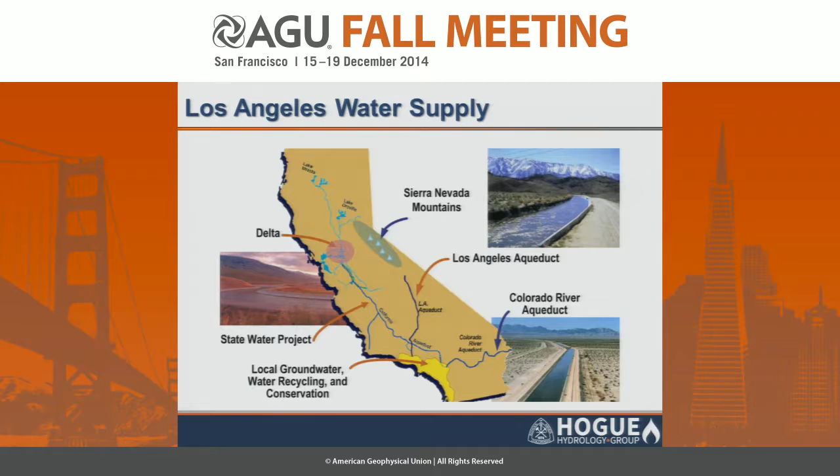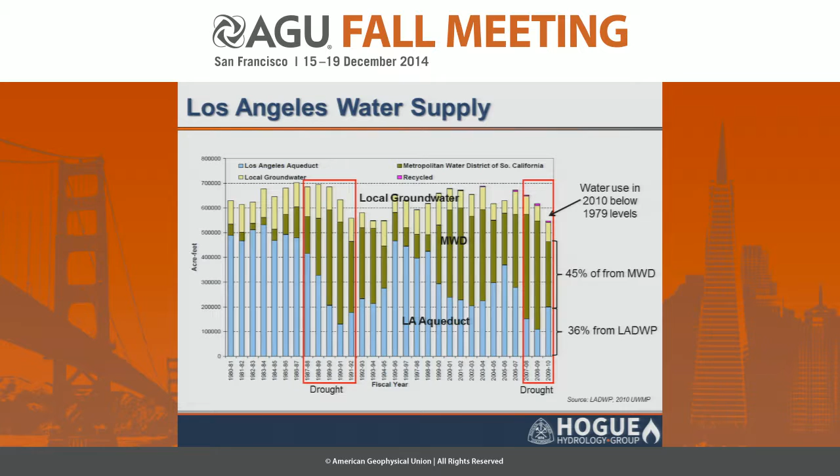You also notice that, given the last drought, we only got up to 2010 here with this data. You see that we're back down to levels from the early 1990s when they implemented indoor water saving structures to really bring down that total water use in the city. So given some of the conservation measures, and I talked about this yesterday in my talk, they've really been able to bring total water use back down. But there's still some issues.

Because of the drought, the state, as many of you know, was under direction from the governor to reduce their total water use by about 20%. And LA specifically put out a directive about 2 months ago saying that they needed to reduce per capita potable water use by 20% within a few years, and also a reduction in imported water by 50%, which is quite dramatic for a city that relies on so much water from the outside.

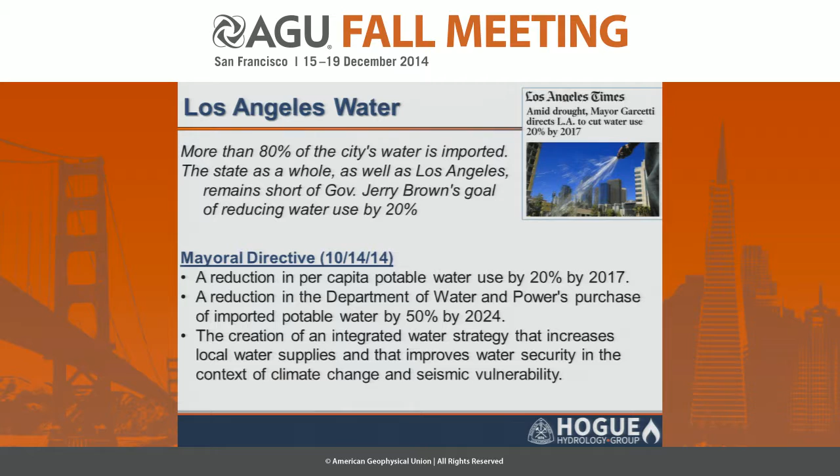So everyone's working or struggling to come up with an integrated water strategy that really looks at all the risks in the system and tries to improve the local supply within the system. So the question is, how do we get there? And this is from the Urban Water Management Plan for Los Angeles, and also in a publication that just came out in ASCE, which says LA is the blue-green city.

So here's a pie chart of the current water supply within the system, the portfolio. And again, you see, on average, the reliance on the LA Aqueduct, about 36%, Metropolitan Water District, about 50%, local groundwater, about 11%, and recycled water, pretty low. And this is what they want the portfolio to look like in about 20 years, in 2034.

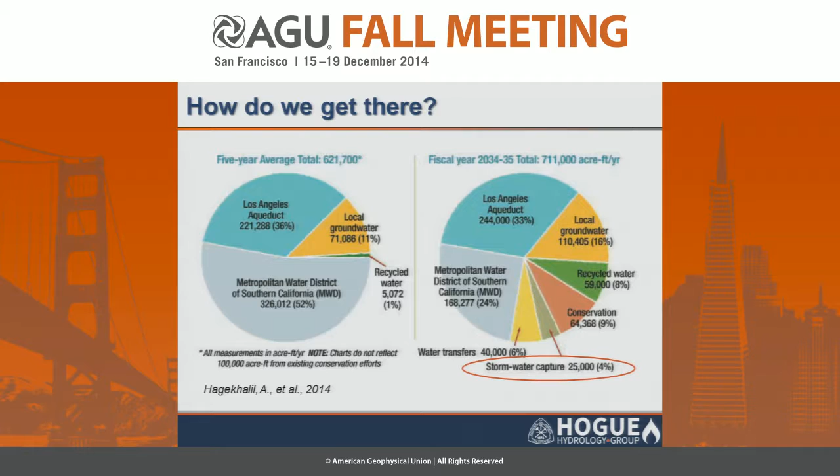So again, you see this big reduction in the imported water from Metropolitan Water District, which is the Colorado River. You also see a slight reduction in the LA Aqueduct, but over here you see this big increase in local groundwater, recycled water, conservation efforts, another 9%. And then interestingly, they say stormwater capture should be 25,000 acre feet per year, and that's about 4% of this pie chart here. And then water transfers are purchasing water from other sectors.

But interestingly, if you do the math, 25,000 acre feet is only about 6% of the annual rainfall over the city of Los Angeles. To me, that seems pretty conservative.

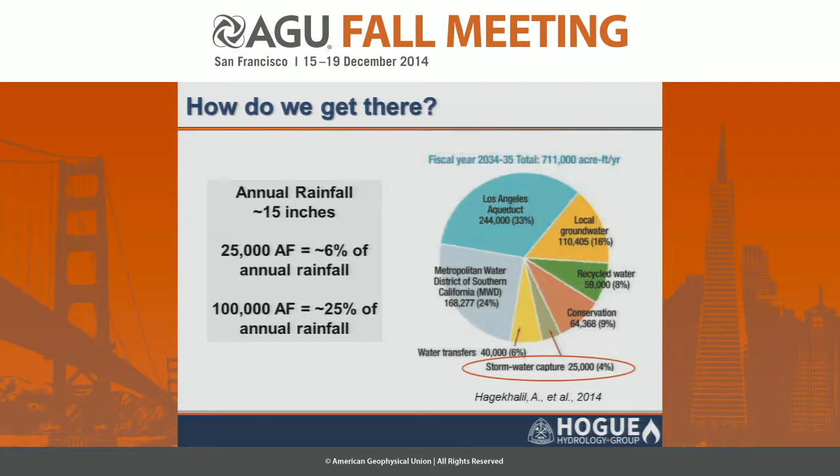You know, if they would capture about 25% of the annual rainfall, you end up with about 100,000 acre feet of stormwater capture. So the question is, how hard or how easy is it to capture this rainfall in stormwater systems, and are we being too conservative, or what's the capacity?

So a project that the city funded is called the LA Clean Water Sustainability Analysis, and it's really looking at LA's One Water vision. But our role in the project is really to look at kind of the TMDL compliance. That was the driver of much of this work, is how do we meet water quality, because Los Angeles is under orders to basically meet TMDLs.

And then what are some of these ancillary benefits, which is we can decrease imported water by looking at more recharge, and can we still maintain flood protection or even improve flood protection if we put in some sort of stormwater capture system. And then other players on the project are basically looking at kind of the added value to health and safety, community parks, and open space.

So we're doing the modeling part of this project, and this is our modeling roadmap. We're using SUSTAIN, which is the EPA's model that has basically SWMM and HSPF and some BMP implementation. We're looking at 3 watersheds within the LA Basin: Ballona Creek, Dominguez Channel, and the LA River. And again, the primary driver is the water quality compliance, looking at the different TMDLs in the different watershed systems, and then the ancillary benefits, as I talked about.

And then overall in the project, they're looking at what are the economics of meeting these compliance, what are the benefits of that additional water, if there is any, and then how do we look at these 2 other streams of wastewater and other water in the system.

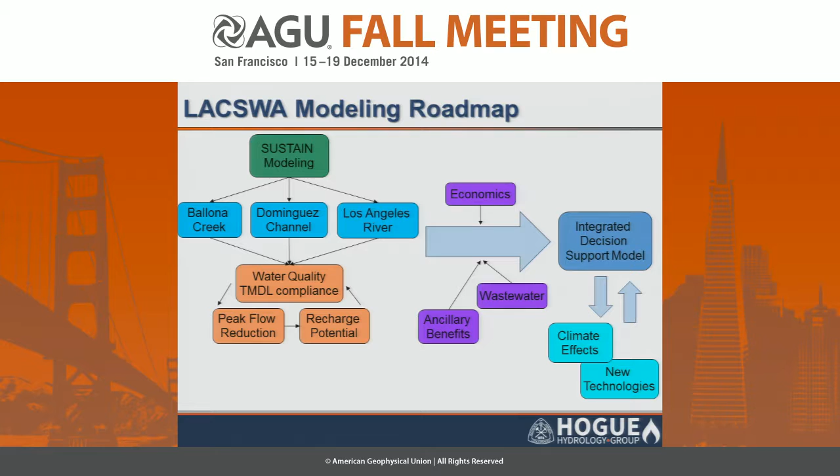So again, the modeling goals are really to look at BMPs that can help us meet TMDL compliance. And here's just a little bit of a statement about where the guidance they're under is basically saying that by 2016, 100% of the drainage areas within Ballona, the one I'm going to show you, has to meet dry weather waste loads, and 50% of the total drainage area has to meet wet weather. And we'll talk about what those are in a minute.

And then in 2021, 100% of the drainage area has to meet both dry weather and wet weather waste load allocations. So that's a lot. I mean, in 7 years or so, they basically have to have 100% compliance.

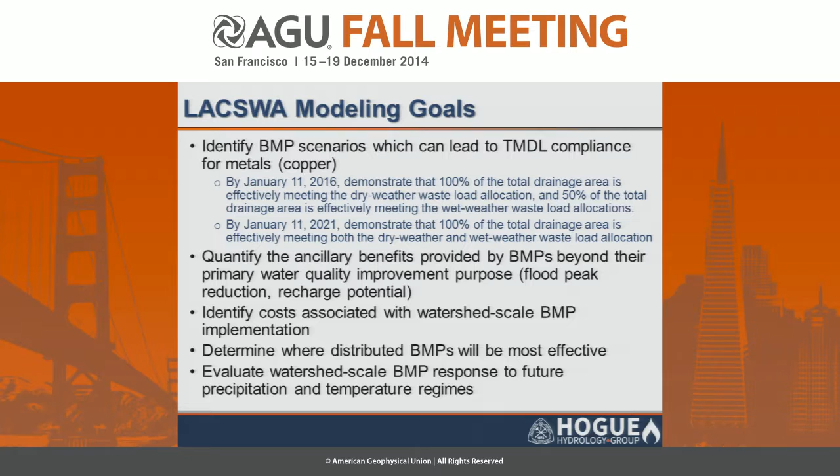And then, by putting those BMPs in to meet water quality, we look at these other benefits, the costs associated with them, where these BMPs would be most effective, and looking at, which is not done all the time, the watershed scale response of the BMPs, and then thinking about how will these perform under future conditions. Oops, I think I skipped a slide.

Yep. So we're looking again at using the SUSTAIN model, which is the SWMM model with the HSPF and Prince George BMPs, and then basically you have some optimizations within that model to look at where those BMPs should be distributed in the system and the cost associated with those BMPs.

So there's 2 ways to run BMPs within SUSTAIN. You can do kind of discrete BMPs at the parcel level, or you can use this aggregate BMP framework, which basically takes runoff from different land cover areas and routes them to different types of BMPs.

So for instance, if you look at high density residential, you can take certain areas of that and run it to a rain barrel, to a bioretention, to a dry infiltration basin, but then that dry infiltration basin may be getting runoff from other land cover types also. And so these are all aggregated, routed through the system, and then you look at the response at the outlet.

There's several BMP options within the model. We're specifically looking at using infiltration trench and basin, dry pond, bioretention, vegetated swale, and porous pavement. We didn't look at some of these other ones. I know earlier in one of the talks, rain barrel was mentioned. But again, I really think some of these BMPs are climate area specific, and I'm not sure that rain barrel is the right thing for LA.

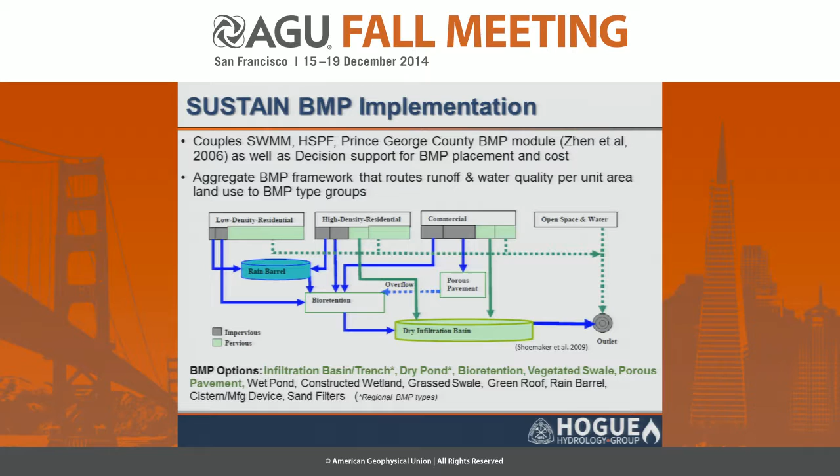As you know, most of the rain comes in the winter. You need the water in the summer, so the question becomes a maintenance and health hazard or health condition with rain barrels. So we did not optimize those.

So our first initial work has been on Ballona watershed. It's about a 130 square mile watershed. We used 8 subbasins within the system to model it. It's been calibrated with USGS and LA County data right above the wetlands.

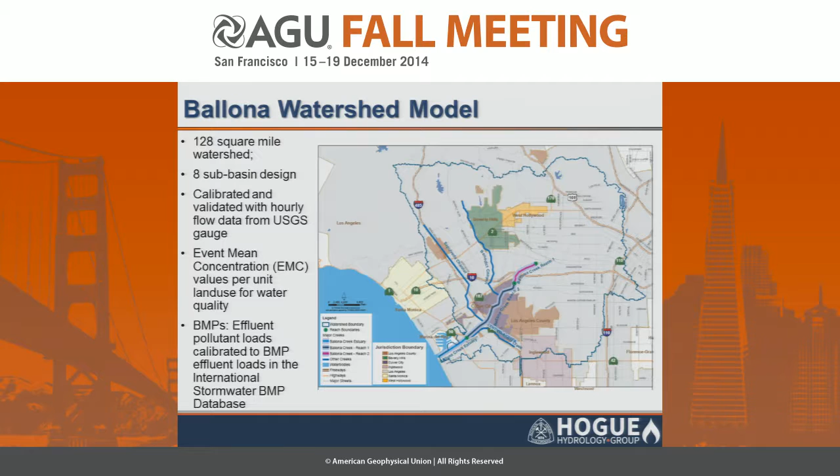We used event mean concentration data that was collected by the county and the city for water quality calibrations. And then the BMPs were calibrated using the Stormwater BMP database. Traditionally, this is what people do when they model. You can use the build-up wash-off or EMCs, and we used EMCs, and we got a better water quality calibration.

So the TMDL scenarios that we ran, a little bit about those. Again, you can do a whole bunch of things in the model. One of the things that it's known for is running these optimizations of cost and BMP types and placement. So we ran that, and that's really optimizing the load reduction relative to cost.

We also did some scenarios to look at compliance, because one of the TMDL regulations says that if you capture the 3/4 inch storm, which is about the 85th percentile storm, you're in compliance. If you just capture that, no matter what happens, if you capture that 3/4 inch storm. So we wanted to see, do we meet compliance if we run that storm?

So we looked at regional infiltration BMPs, which just capture all the water and infiltrate it, plus treat and release. We also looked at LID retrofit. So again, the ideal thing, if you know Elmer Avenue in Los Angeles, is to retrofit the system, see if everyone has this nice capture system within private property. So we looked at that scenario.

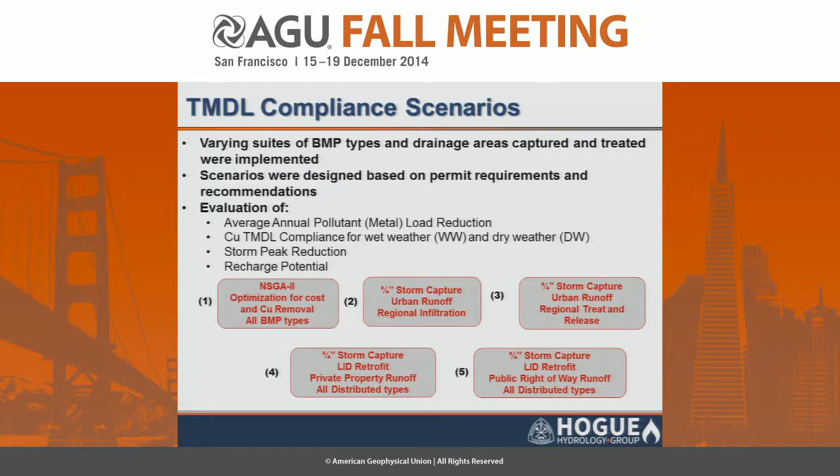And we also looked at public right-of-way runoff, thinking if we just put BMPs along the public right-of-way, which is easy to do legally, how would that perform? So here's some results, and this is just an overview of some of the scenarios. There's a poster this afternoon by Katie Radovich, a student that's primarily responsible for most of this work, and we can get more into the details there.

So when you look at the wet weather compliance and the dry weather compliance, wet weather is basically if there's a peak flow or a maximum flow of 64 cubic feet per second in that day, it's considered a wet day. If it's under 64 CFS, it's considered a dry day. And they actually just changed these. They were at 40 CFS, but because there's so much dry weather flow in the system from irrigation, they upped these.

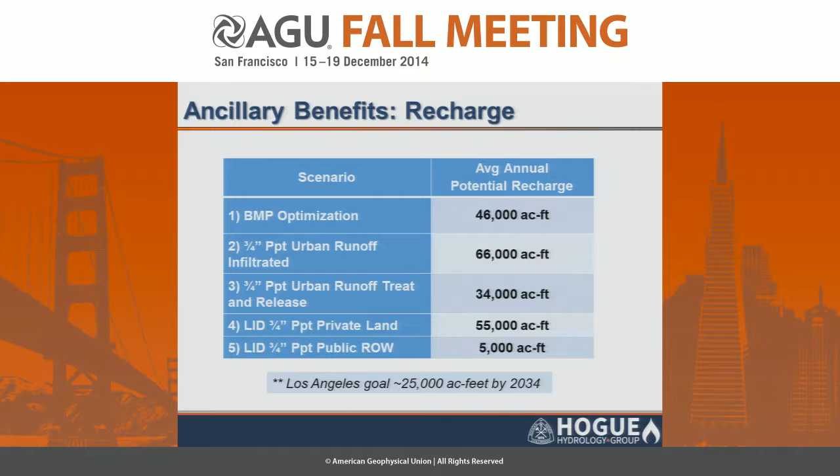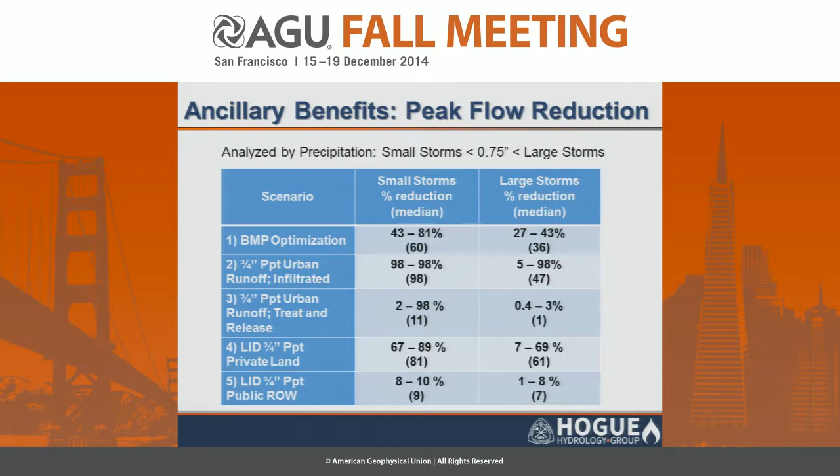So I'll conclude on this slide and basically say that I think the goal of 25,000 acre feet stormwater use by 2034 is obviously doable. It's only 6% of the annual precipitation. So the question is, is that under-ambitious for the city's goals? Obviously, there's other factors to consider. What's the storage and how does that play into the regional groundwater plumes and things as far as contamination. But again, I think they've got some fairly realistic goals of stormwater capture.

From our work with BMP implementation at the watershed scale, the treat and release have the best TMDL compliance, but really remove the smallest pollutant load per storm. The infiltration BMPs have a lot of capture, they provide better flood protection, but during smaller events, the pollutants are more concentrated and you have more exceedances.

Recharge potential can be significant depending on design, but again, we've got a lot more to evaluate, which is design cost, which is quite significant. Space considerations, where do we put these things? We don't even think about land cost within LA, which is, of course, as you know, very expensive. And then you've got the operation and maintenance costs. So again, we're just looking at the initial upfront physics of the system, but there's all these other things that we still have to consider.